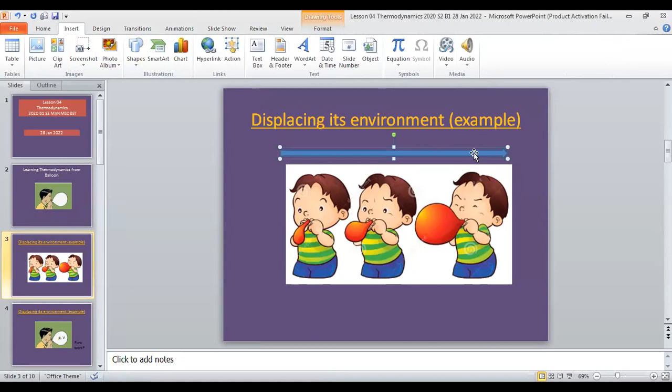Can you imagine? So if you think of this displacing of the environment towards this direction, it is something like a positive displacement, displacing the environment. This is something like positive for the balloon because the balloon is getting bigger and bigger.

And the reverse, if releasing the air inside, so it is something like a negative, but anyway, it's still a kind of displacing the environment. Very interesting. Understand? Yes, I believe you can understand. Thermodynamics material easy—is it so easy?

Then, actually, what does blowing mean here? You make the flow of air. You are creating a flow of air, that is from the mouth. You are creating a flow of air. Make a flow of air, and that air goes into the balloon. Air flows into the balloon. Flow of air into the balloon. Interesting. Make a flow of air into the balloon.

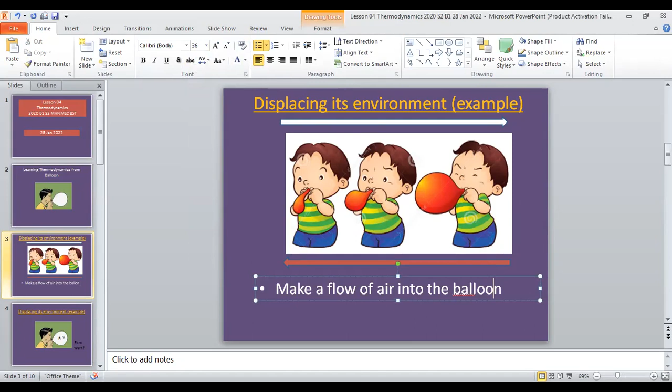Obvious. And who makes this? You make this. So this flow coming out from the mouth flows into the balloon, and then the balloon becomes enlarged and it's displacing the environment. So two things: there is a flow of air, you make it, so there is a flow work. Flow work, because you are doing work, you are putting an effort.

You feel it, and even for you there is a limitation. There is a limit for you, there is a capacity, a physical capacity for you to blow it, not to the fullest. If not, you have to use an air pump, then you can make it more. Even with an air pump, there is a flow work. So here there is a flow work done by you on the air.

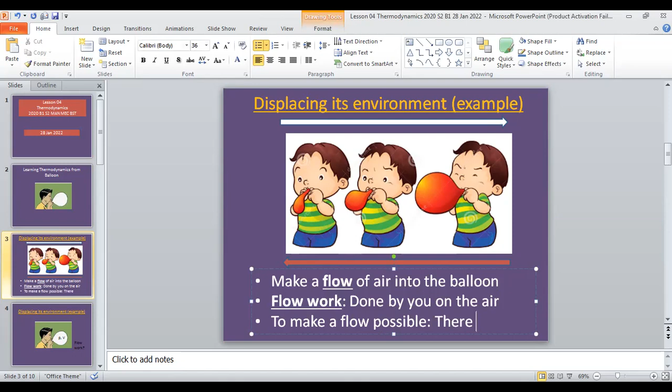So two things here: flow work, and there is a flow. Interesting. To make a flow possible, there should be a work done on the flow. To make a flow possible, there is a work interaction. Here we call it flow work. Let's say this is for a flow.

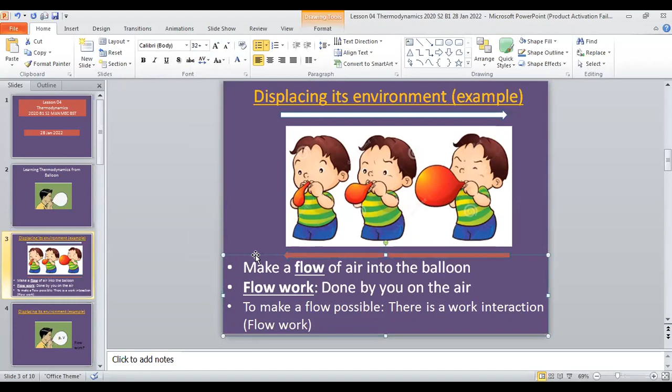Yes, this is good. I will take a simple example, more familiar to you. Today's lesson is quite challenging, so you should listen very well.

Let's say I take a block of mass, let's say this is something like a block of wood or steel or whatever, a block of mass. And you know Newton's second law. So if there is a force, let's say this is the net force applied, of course when there is a force applied, the momentum changes, and we can see that with the continuous application of the force, this mass moves. Continuous application of the force, this mass moves.

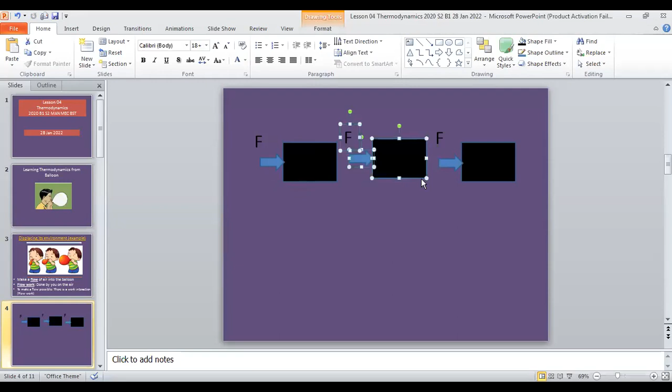Yeah, so if because of the force, there is a displacement of this block, displaced. Go here, you can see the displacement. So this displacement, let's say d.

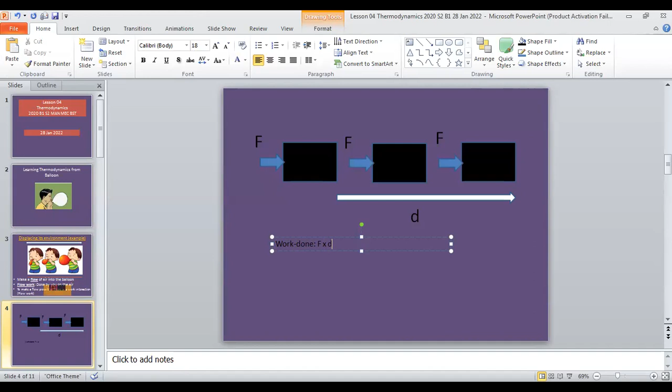Because this force is needed for this, so there is a work done. There is a work done to make this mass move. We call this force times displacement. You know this simple expression. Work done is force times displacement.

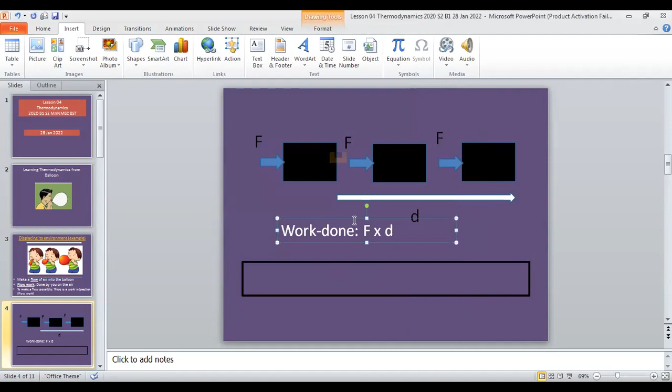You can see packets of, let's say this is water, something like packets. Okay, your segments are moving. You can imagine like that.

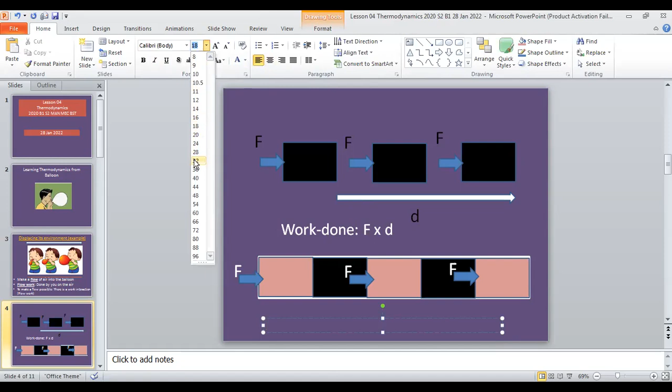Good. So that's why there is a flow work, even in pipe flows, maybe water flows. Air flow also the same. So in short, flow. This could be the flow of liquid or gas or even vapor or even liquid plus vapor, whatever.

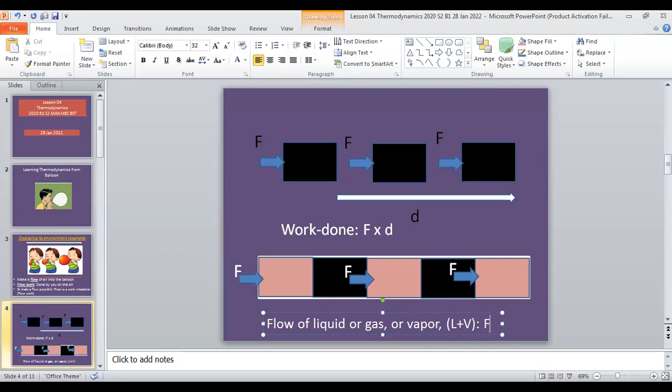So flow work is relevant when there is a flow. So flow work is relevant. You no need to think that much, but simply try to have some little understanding.

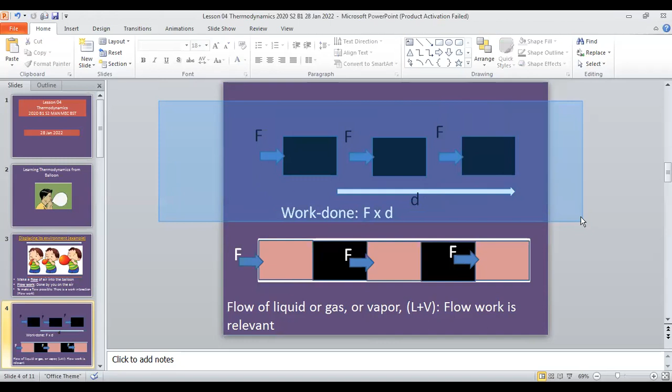So work done. So in simple terms, for a flow, we call it flow work. So blowing a balloon, also something like a flow work. You add some work on this flow. Also, you are creating the flow. There is a flow work. Addition of work onto the flow so that the flow makes possible. Okay, flow work.

Interesting. Okay, very interesting. And in the flow works, there is a displacing effect on environment or surrounding. So this balloon example is very nice. When you do this flow work, you feel pressure. And the balloon is expanding, so there is a volume as well. So the balloon pressure is same as the pressure you have to blow from the mouth.

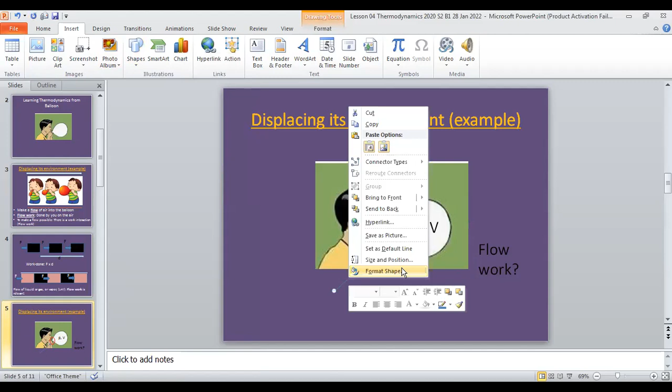And this all the volume came out from the mouth. So if you think of flow work, interesting, eh? Flow work. One-time learning. Flow work. You feel that without this flow work, it is not possible to blow the balloon and not possible for the air to have this effect without flow.

So this makes sense. So we should be able to evaluate this flow work. Before evaluating, we should be able to understand the flow work. Flow work. You never thought. Because of this flow work, this blowing of balloon become possible. Blowing of this balloon is possible.

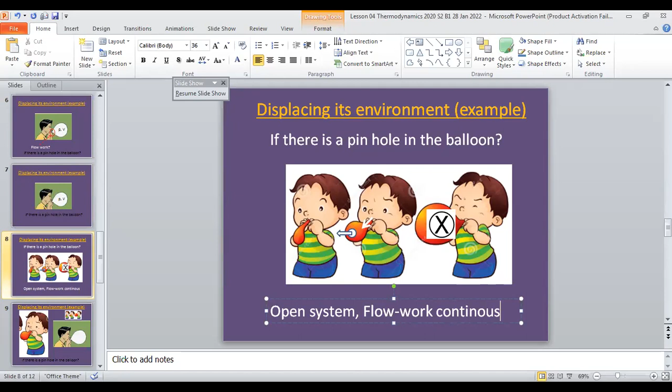Yes, it displaced. But if there is a pinhole, now this becomes open system. And flow work continues because there is an in and out. Otherwise, there is a limitation. This becomes open system. So there is flow in, there is flow out, and flow work continues. Okay, good.

Yes, so flow in, flow out, flow work continues, and there is no change in the volume. Let's imagine there is no change. There is a flow work continues, the same way.

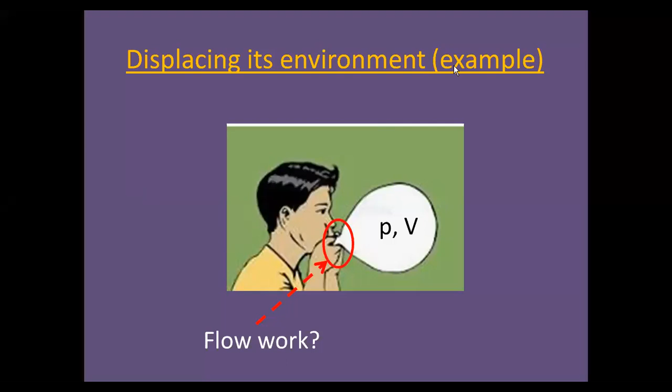This is a pipe. Flow. You can see this flow also something like displaces, this pushes this, and likewise. So there is a flow work. When there is a flow work, it's a kind of phenomenon.

Even for this balloon, even with no hole, there is a flow work because the balloon stretches. So until a certain limit, there is a flow work. So from where does the flow work come? Yes, from the pressure, and there is a... okay, good. Interesting.

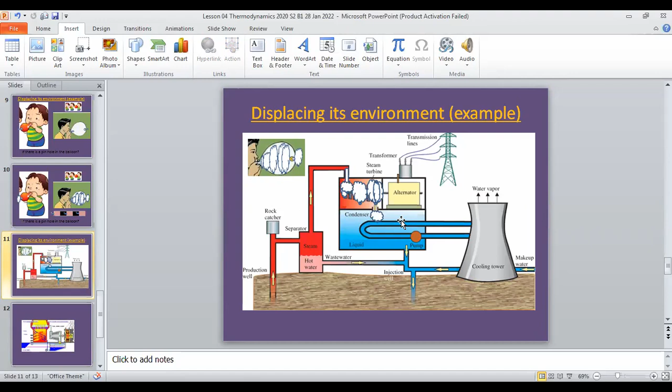Finally comes out. So comes in, is highly energized, like blowing here. Goes out, is less energized. That's the point. Okay, highly energized to less energized. Once it leaves.

So here you can see, highly energized, because of the flow work. Here, for this case, in is highly energized. Interesting.

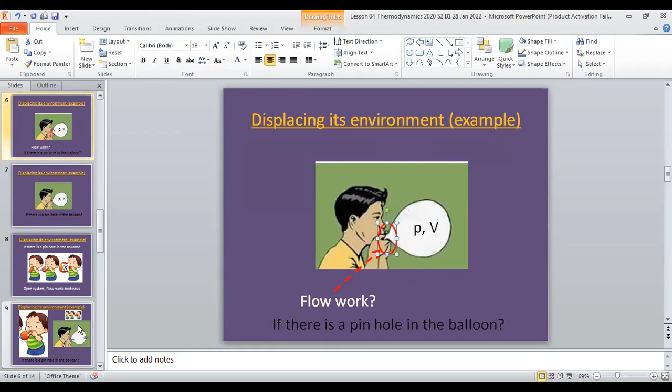Here, leaving, is less energized. Possibly less energized. Less energized, possibly. So, less energized. Put a question mark here at the moment. And later in the applications, you will see this is less energized. So this is how it is.

And now the balloon, we can say there is a volume and flow in and out. And the flow in and out, there is a flow work in, and there is a flow work out. The leaving air here from the balloon does work on the surrounding, because this displaces the surrounding. And here this displaces this air here. Push, push, push, and all the while here it displaces the surrounding, and also this maintains this. Okay, so that's how it is.

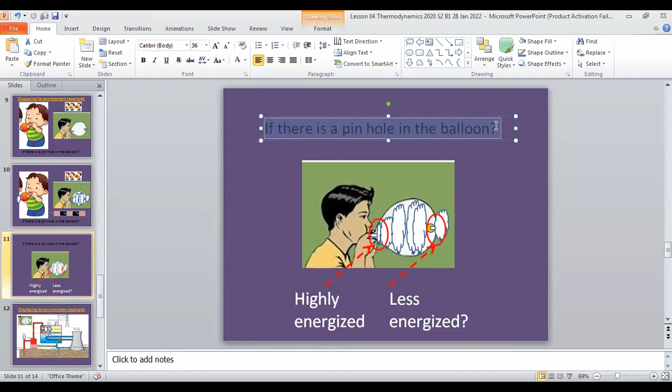Yeah, so now let's say, see, even in a balloon now, there are many things to look at. The flow work in, for the moment, flow work takes place here. Okay, takes place there. And it depends on...

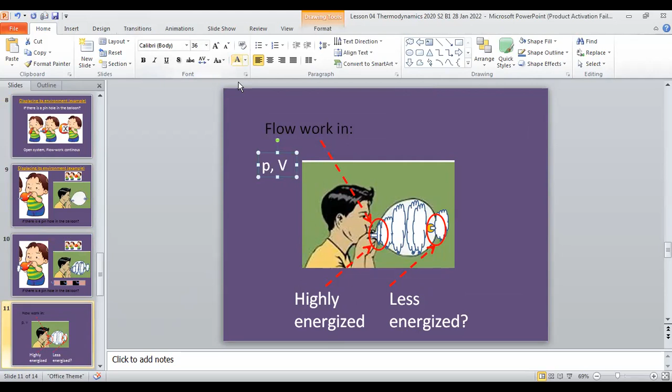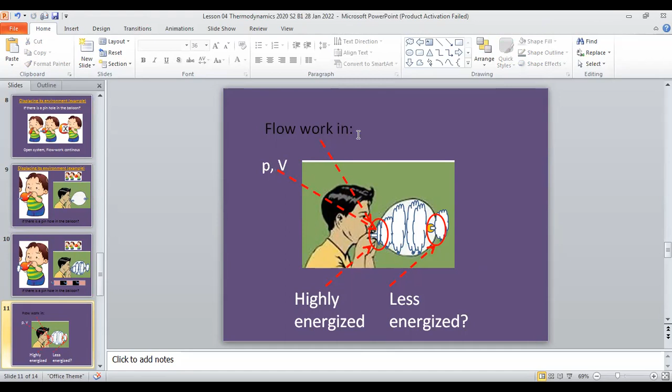The P and V related to the flow in here. P and V here, in, okay, P and V. So this in, let's say this is 1 or in here. So flow work in is the pressure here. So it depends on the pressure in and the blow volume. Let's see, pressure in and blow volume in.

Because you feel the pressure, you know there is a flow of air going in from your mouth, leaving the mouth and going into the balloon. So you feel it. And the flow work into this balloon system depends on this, so we call it a function of pressure and volume in, meaning what's leaving the mouth is actually what goes into the balloon. This is just before entering, just at the entrance of the balloon.

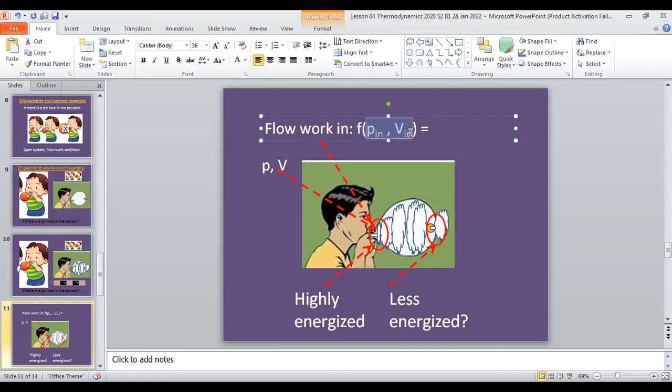And actually this is equal to, later I will explain, pressure times the volume in. Pressure times the volume in, multiplied - this multiplication of the two - is the flow work in.

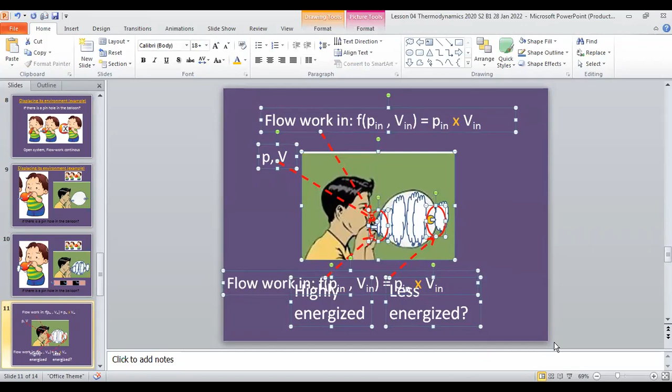Same way, flow work out. Let me rearrange this. Flow work out - this is out, just at the leaving point. So flow work out is P out times V out, or a function of P out and V out.

And at any place, let's say somewhere here, because here also there is a flow work. So in general, if you think of at that point, a pressure P and a certain volume V, then the flow work related to this V and P is P and V - multiplication. You can imagine the existence of PV. There is also continuous moving towards it, because in and out there is continuous flow work.

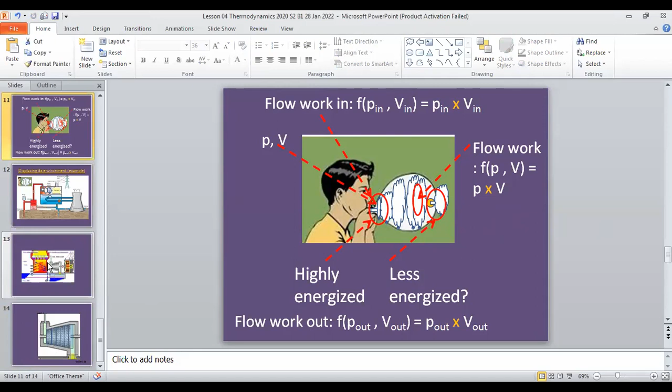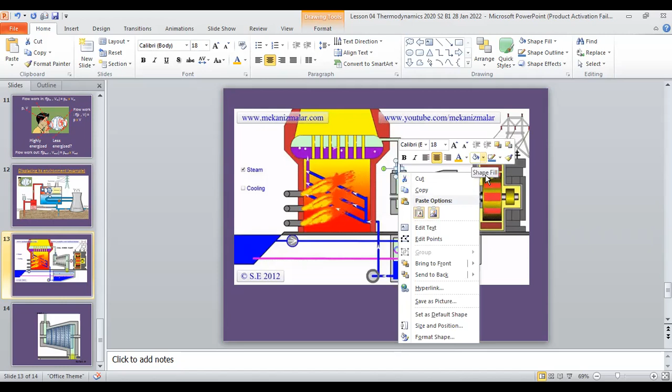Here's a better example. See, this is a boiler here, and the high pressure steam blows in here onto the turbine. That's why it's interesting. Same line. See, it blows - same like a balloon - and out.

Less energized, because this steam turns the turbine. So this blows in here and expands. This does work as well - it's a different story, but you can see there is a leaving of this. So unlike the balloon, this steam does work here. Later I will explain this with a simple example.

Here it is very interesting - at least this has the turbine effect. See, it takes the shape. That is what it is. So here you can see some similarities, but the only point is with this expansion - because of the shape, seems like the balloon - anyway, in and out, this is highly energized. So when this expands, it can turn this turbine. The flow, the flow work, can turn the turbine as well. It is something like this. I will show you a very nice example.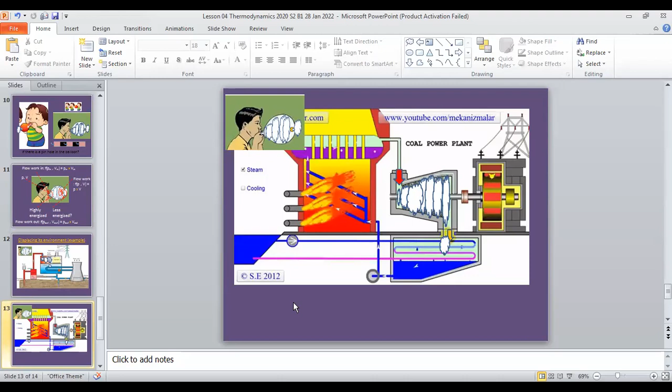No difference - so you are displacing. The flow comes here from the mouth, expands, and with this expansion there is a possibility of doing work, turning this little fan, toy fan - that's a possibility. So in and out, you can imagine. It is very interesting - the same turbine concept: high pressure steam in, then leaving and expansion.

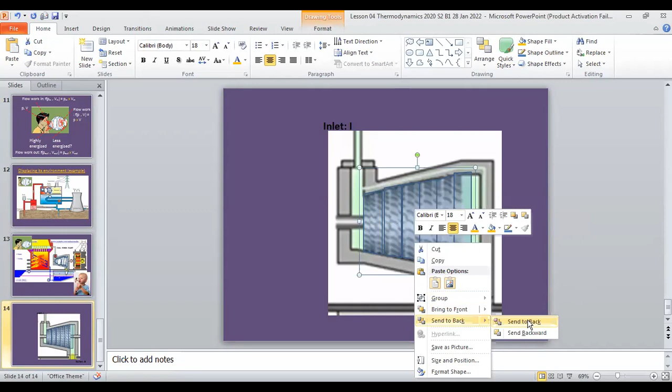So you can see the fan blades. When this steam comes and expands all the way, it is like blowing a fan - like a little boy blowing a fan, same way you can see. But the only thing is here there is more effectiveness - you can see the conical shape, and there are so many fan blades, all radially placed. A boy cannot blow this, but energized steam can blow this in and out. So all these lessons are here to explain flow work.

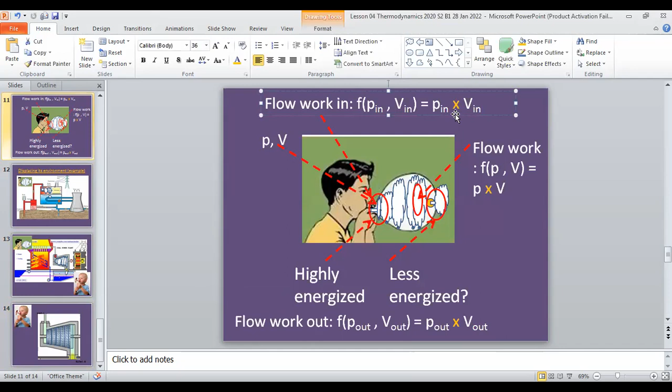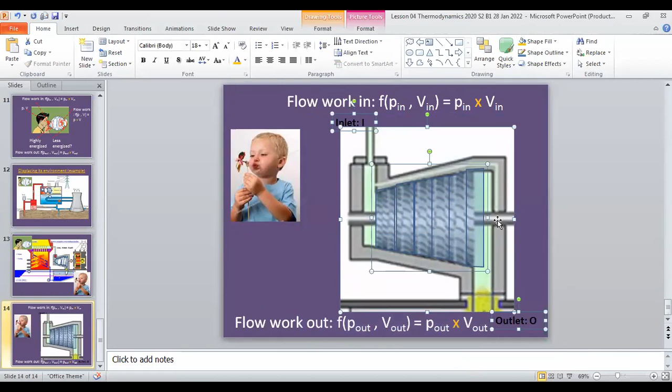And let me bring the flow work expressions from here. Flow work in and out. Flow work in is P in times V in. Flow work out is P out times V out. Okay, so in the turbines, all of this relevance is flow - for the flow.

Flow means in and out - in and out. So let me mark in and out as well: inlet and outlet. This is inlet, this is outlet. So this displaces here, and this displaces the surrounding. So you can see P out, P out. So generally flow work means a function of PV, which is P times V. I can explain this, but I will explain it afterward, not now, because your focus distracts.

This means the steam's total energy level rises. So this is how we take it. Flow work is PV. So energy in is U plus PV in, and this U plus PV has a single notation, we call it H, with the big U here. So this U plus PV together is the energy in the flowing fluid—gas, water, or two-phase, whatever.

The same way, for the out: E out, let's say EO, I just put O as outlet. UO, E out, plus PVO, giving HO. So energy out—we have to add this flow work as well. Other than the internal energy, because of the flow, there is an energy related to this. So we call the total U plus PVO.

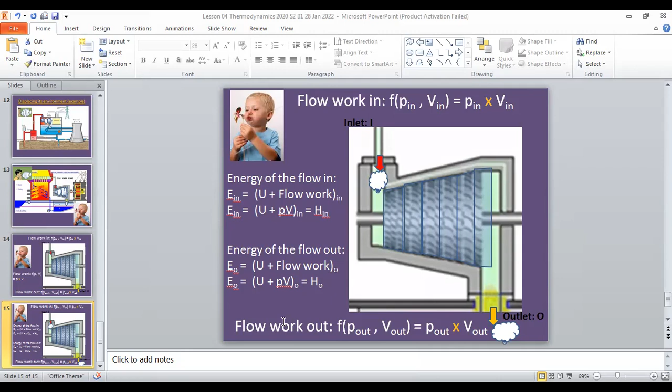Enthalpy. So enthalpy defines a new state variable. It's a definition—enthalpy defines a new state variable that is a combination of other state variables. So these are the variables. I need you to pay attention to some limited variables here. Enthalpy H is defined as the sum of E...

What is E? Internal energy plus pressure times volume, so E plus PV. The website isn't going to explain this, but now you have an idea how this E plus PV came about. It is very important because this is for propulsions, jet propulsions and all—enthalpy is very important. So enthalpy is defined as E plus PV, that is what I need you to pay attention to.

Equals this. Subscript, meter square, superscript. Okay, so Vg. But I hope you have no issues, because it takes time if I need to put the subscripts and superscripts.

P times Vg. Vg is here. So 100 kilopascal times 1.694 meter cube per kilogram. So this one, the total becomes 169.4.

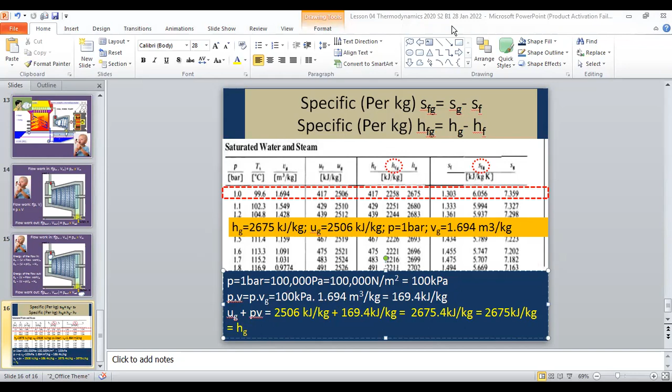So what this says, so U plus PV is H. So here Vg here, U plus PV is PVG. So H is U plus P. And if you are going back to the previous... in a second. So this one, I added somewhere here. So H becomes U plus P based on this calculation. So enthalpy, this is a good slide, it seems.

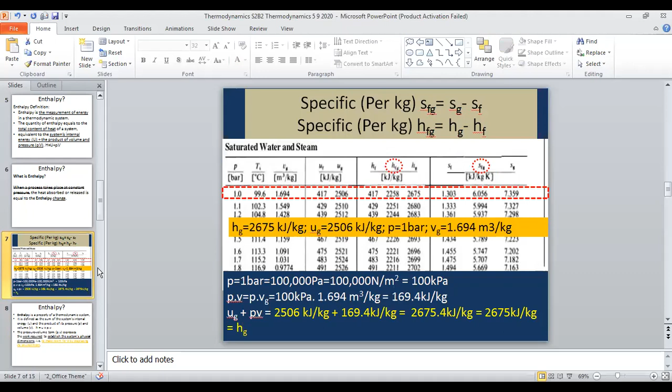So now you can see enthalpy is a property of a thermodynamic system. It's a property, even it's in the property table. Okay, and U is a property, P is a property, V is a property, so U plus PV is a property. Okay, so small u means for 1 kilogram, small v means for 1 kilogram. It is defined as the sum of the system's internal energy and the product of its pressure and volume. The pressure volume term expresses the work required to establish the system's physical dimensions, to make room for it by displacing its environment.

Okay, so I take this slide only, okay, I take this slide only for your addition into today's notes about enthalpy. Good, so this is the enthalpy definition. Defined, it's a definition. Also I will add that NASA slide as well. Interesting. Okay, interesting. Good.

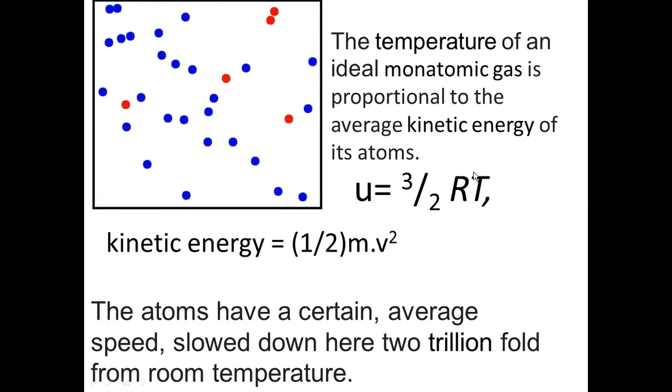So see, the temperature of an ideal single atomic gas is proportional to the average kinetic energy. So this kinetic energy, we call this internal energy. This average kinetic energy of its atoms, kinetic energy is this, but further looking into this, internal energy is 3/2 times RT. Let's say anyway, it's a function of T. Okay, so that's why always temperature. You no need to look into further details on this, but these expressions are here for us to understand that internal energy is a function of temperature. And R are the specific gas constants. So later we will look into this, and this has a relationship with the molecular masses as well. Anyway, temperature matters for internal energy. High temperatures, high internal energy.

The enthalpy definition is here. You know that in the enthalpy, the internal energy, these are the sayings about internal energy. The internal energy of a system can be understood by examining the simplest possible system, an ideal gas. Ideal gas is something like this: single atom particles bouncing each other with no losing of its kinetic energies. Okay, so later we will learn about this. So the internal energy of an ideal gas is therefore the sum of the kinetic energies of the particles in the gas. So kinetic energy means the energy of the particles because of its motion. Kinetic energy, Chalaka Shakti, the energy because of its motion.

So that is internal energy. So all the gases have this molecular motion, and because of this, there exists a total energy content due to the motion of this, or the kinetic energy we call it. So the system's internal energy and temperature, if we think about this, the temperature of gas is proportional to the average kinetic energy of its atom. So R is the gas constant, temperature here. And the average kinetic energy is what we call the internal energy.

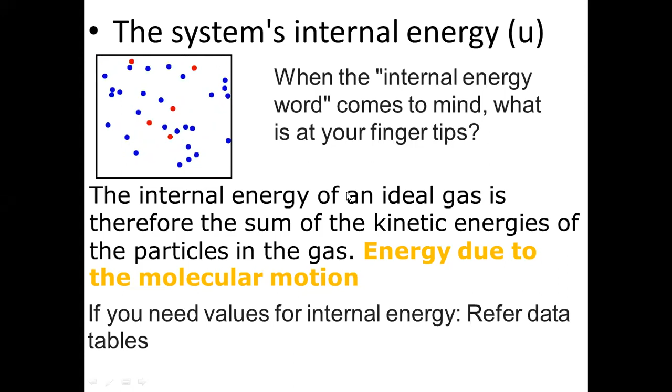Internal energies. So even here you can see this slide. Internal energy 2506 for gas. F means for liquid phase, only 417. Both at 99.6 degrees Celsius. So per kg, the gas phase has much higher internal energy compared to that of the liquid phase. That's a big difference. The bigger the difference, that substance, example here water, would be very useful for thermodynamics applications. That's why we have steam turbines, for power generation we have steam engines, for power generation and to run the other machines and all. So higher differences in internal energies, in enthalpies of liquid and gas phases.

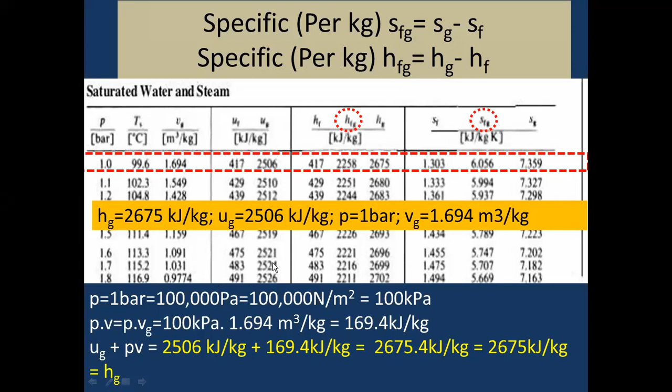So this is the advantage for power generations. Once turned into vapor form, packed with huge amount of energy. Small mass, more energy. Otherwise, we have to have bigger machines if the energy is less, because we have to have more mass. That's the reason. Good.

And now, so today's discussion, very useful. So you learn about H and U. And this H and U are all thermodynamics properties. So connect this with your one-time note understanding. And your understanding is with some physical sense. I feel it is very good at this time.

I need to focus on some practical examples for the other discussion.

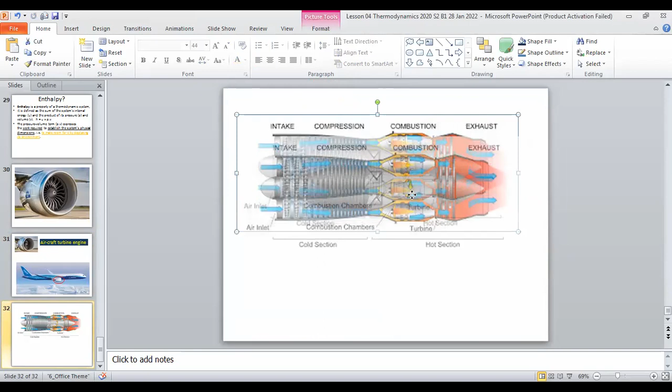This is a schematic of these engines. There are different engines, but here is the basics.

So there is an air intake. And of course this is turning, and the first set of blades compress this air. Then this air sends into the combustion chamber or the combustion space for combustion, to make the combustion possible, because the fuel addition is here.

Let me make it big. The initial blades all radially turning, and this turning makes the air suck in. Sucks in means suction, okay, and then sucks in further - the conically inwards turning of these blades makes this suction.

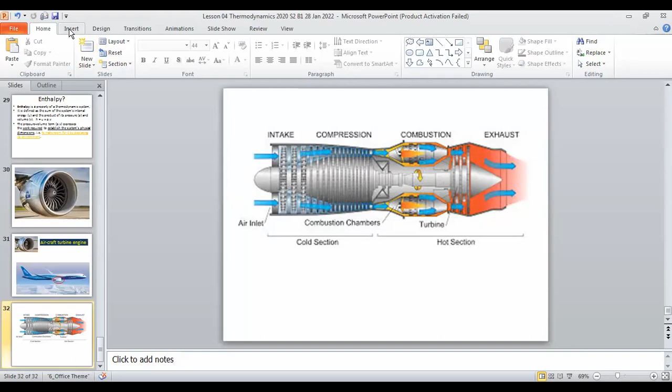Okay, so look into this, it is very important. You can see the compression, the turbine effect, flow in and out. So what matters is the internal energy and flow work together. Enthalpy is important, energy levels.

Here I just put H1, input energy level, intake. Then after compression...

Because it is same like the balloon effect. So after combustion, H3. After combustion, entering the turbine, energy level H3. Leaving the turbine, H4.

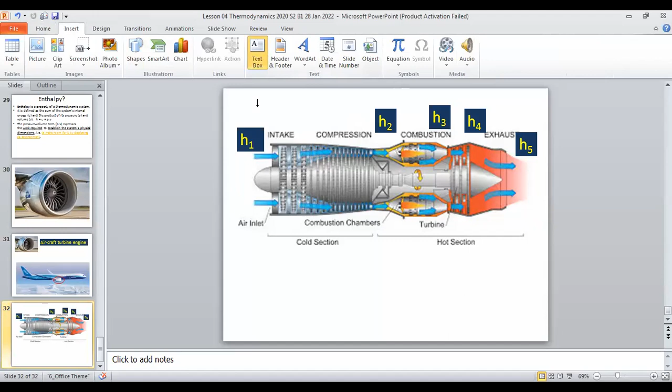It is related to this, H2 and compression. Before compression, inlet to compression is 1. So H2 and H2 minus H1.

Interesting. Then comes the combustion, because of the flow energy. Combustion adds energy, so H3 has more energy, the level of increase.

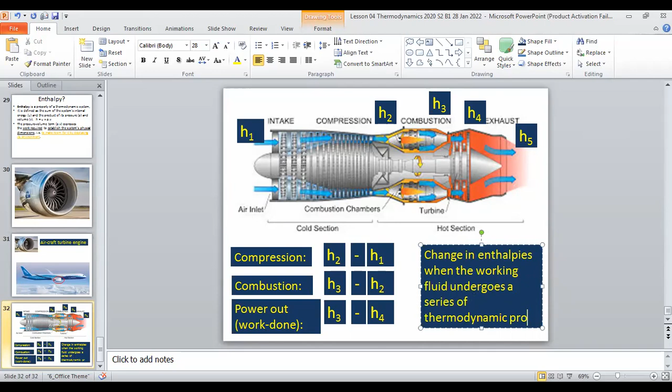So combustion, there's a proper name for this. Actually, combustion is heat addition, at constant pressure, here in the combustion chamber, no pressure rise, constant pressure heat addition. Combustion means addition of heat into the working fluid.

So the working fluid undergoes some thermodynamic process. Because of these processes, it undergoes some changes, thereby this power generation and the creating of thrust to move the plane is possible. This simple, small piece works in marvelous ways. Works in very marvelous ways. So you can explore this.

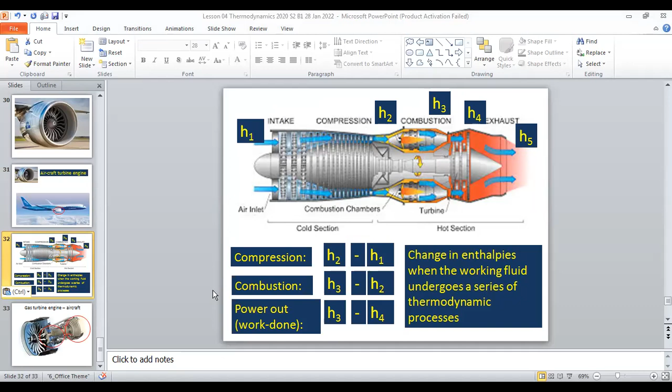Now I will show you the 4 strokes, not to say strokes, but in the engine's 4-stroke, you can see the suction here, compression, combustion, power, exhaust. Engine also, you are seeing the same: suction, compression, combustion, power, exhaust. So the combustion means the energy addition, heat addition, that is after compression, because now the fuel is ready to ignite. So power means the expansion of this hot gas.

Okay, power here, then the air goes out, so there is a certain energy in and change of the energy levels, and finally energy out. So this all happens in the sky. Hot air out and take the fresh air in. So hot air out means you are adding heat to the atmosphere.

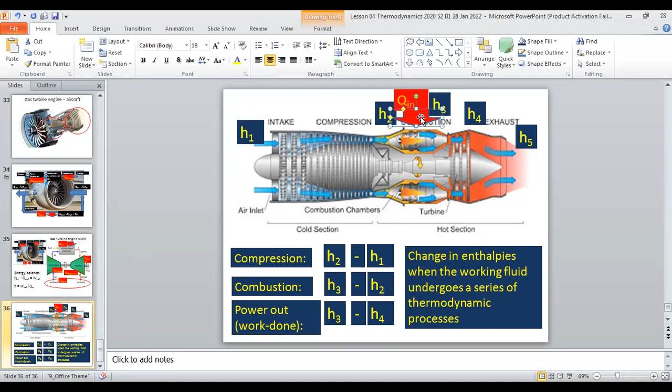Take this. And here, it's the same, energy in. See, combustion makes the energy. This is where the energy comes to run this and make the aircraft fly.

Then the loss. Actually, this is Q loss, energy loss. Q means energy. So there is a Q loss, when this exhausts, with this exhaust, Q loss. Interesting. So then you can have your energy balance: Q in minus Q loss.

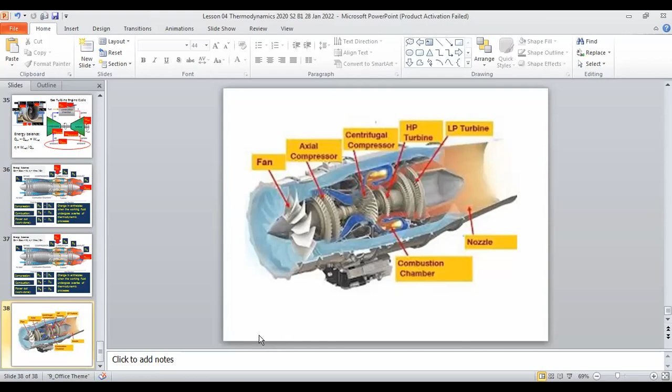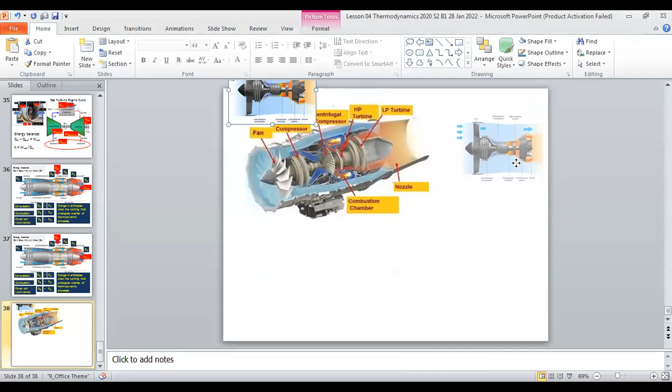See the nozzle component after the turbine. This is not simple exhaust. When the gas exits, it tries to replace the surrounding with the gas, and as a result, this moves forward. Third law: every action has a reaction. So that's how this propels, but all the same: compression,

combustion, power, exhaust. And of course, before compression there is suction, same as in four-stroke engines. You can see this, because the working fluid should be sucked in from the surrounding. So thermodynamics-wise, it is very nice to make aware that thermodynamics makes all this. So you have to learn further about compression and expansion, no matter turbines, no matter engines - compression and expansion.

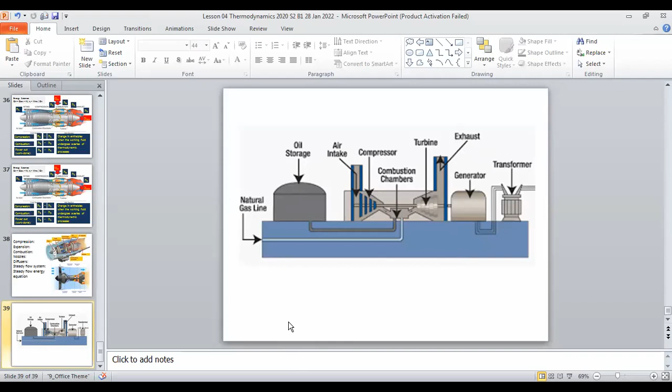So this knowledge - now you can see compressor makes compression, combustion, turbine is power, and exhaust. You can see all the 4 strokes, fuel tank also here. All simple, but these are very important because think about what's taken place here - not the pieces here, but the working fluid, the air, what makes the change and all. So you can outline the solutions, you can understand what's taken place.

Because with this knowledge we can analyze thermodynamic systems. First we should understand what's the sense of thermodynamics for you. Then you can improve the systems, you can look for new solutions. And actually, why can't we produce turbines? We can. We can develop - not the high-tech ones, but of course producing a turbine should not be that difficult, but you may have different levels of temperature limits, upper limits to operate, but you can have turbine solutions using your own ones.

So in this process, how will they ignite the natural gas? Yes, because compression makes the air temperature high enough to auto-ignite. It's hot air, no? Yes, hot air.

Compression makes the air hot. That's why the compression is used, like in a diesel engine. So one way it brings a sufficient amount of air, and the other way that air is compressed.

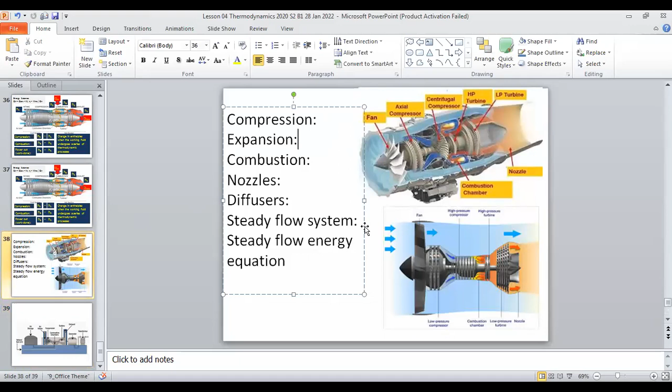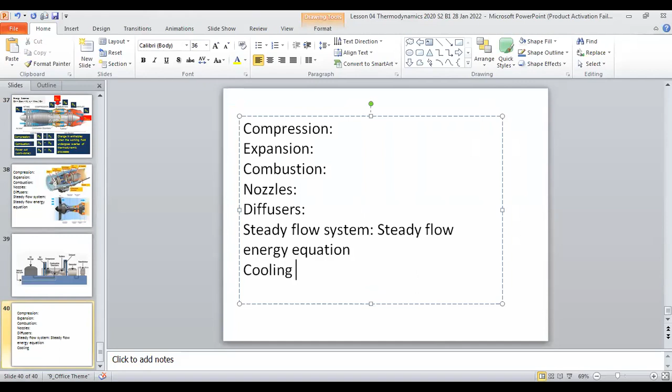This is your one-time note, but you have not seen any of what we have discussed here. And so many things, even in refrigeration and cooling technologies, later I will share with you. I need at least 4 hours to discuss cooling technologies, the thermodynamics and some analysis.

The most popular one we call vapor compression refrigeration. See, the compression term is there. Nature's phenomena, we are adapting it in such a smart way that we can get many things done for humans' benefit. So vapor compression is another similar system. We will study this very well.

I can explain all of this very nicely for you to have a very natural understanding of the subject. That is very important, because you cannot have this subject limited to words, not possible. Words are secondary, that's why I am trying to give you this awareness. So we are connecting the reality with so-called textbook theories, so afterward we will be ready to discuss the laws of thermodynamics and all.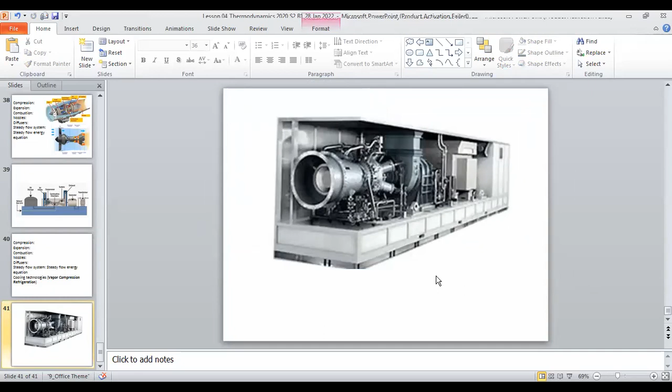So here we don't need the thrust - that's why aircraft engine turbines need a thrust, so only partial work is done, a smaller turbine. But here the turbine effect is to the fullest and you are sending just the exhaust out. Here maybe all the other controls and all - so that's how it is.

Interesting. So turbine engines - those on the ground can be heavier, bulkier, bigger, no issues. Let me share this screen, maybe, for power generation turbines. Gas turbines - maybe I will just put the images.

You can see the very big ones here - see, big ones. See gas turbines, General Electric - massive ones. But let me take this, okay.

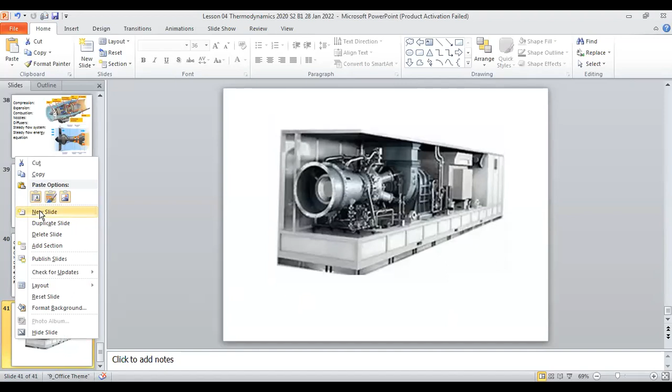How are you seeing the simplicity of this? How are you seeing the simplicity? To have a knowledge of this, you must have some elemental level approach, elements.

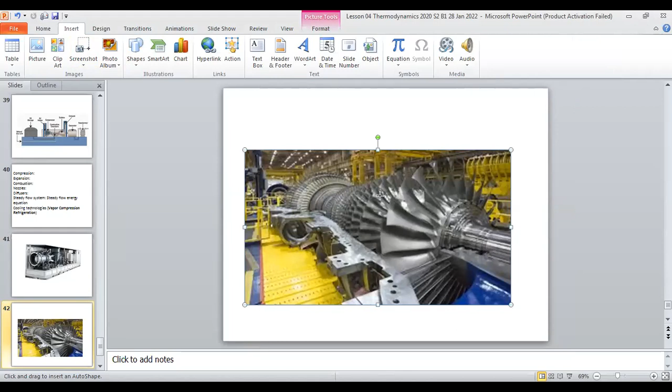For example, here you can see all the blades. So if you think of a blade design, to understand the turbine blades - see, you only need to know about this, the fixation and all. This will be 90% of the knowledge here. That's right - to learn 100%, you don't need to know about everything, just 90% is here. Okay, elemental level. Here there are blades, so all the design phenomena is all common. That's why you should have no fear.

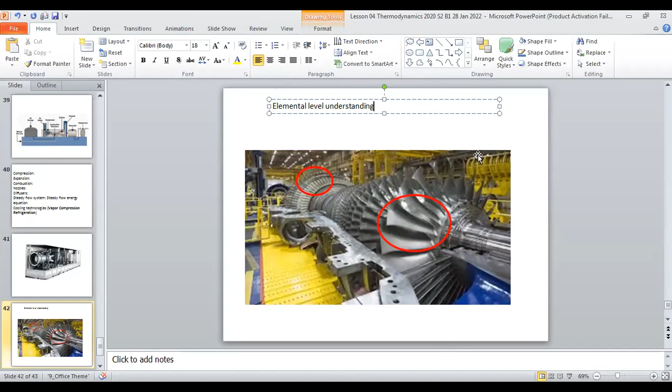So when you are going to see this, don't see this as a bulky one, you know. You have to have elemental level understanding. That's why I'm telling you, you can design turbines - elemental level understanding, see?

Even in our childhoods, we have toys, maybe a bamboo, it's like this, but of course they have some experience-based knowledge, true. But they also try from the beginning - if we have some national level projects of developing this, no big deal, you know. Of course mega constructions involve a lot of technology and engineering aspects, this needs resources and money. So the governments, earlier they had some good projects and all, but if governments can think on this, it's very easy.

So your side, see always the essence of the technology. The essence, it is very small. When you further look into this, further simplify - if you further look into this, fan blade. So if you take the blade and analyze it, you know the effect of that. So elemental level understanding and analysis is very important. Then you have no fear, no matter how big or complicated to advance, you can know it overall. If you have enough guts and the mindset, a very good mindset, you can go ahead.

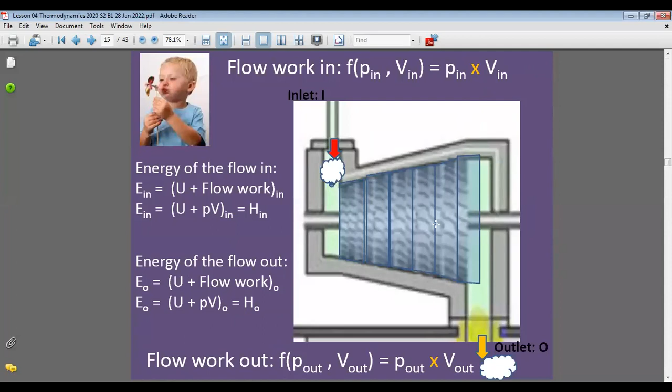Very interesting what we have discussed. So nice. Finally, we came to very important knowledge receiving. So learn about this. Later we will go for more analytical aspects. And I'm going to email you this immediately after the session.